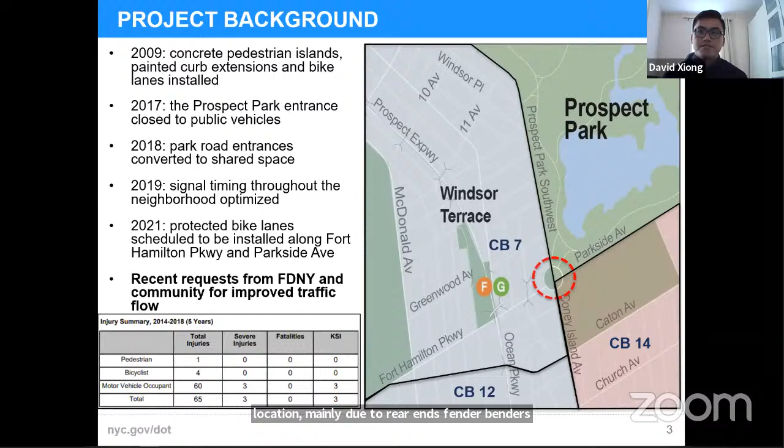It is a high vehicle crash location, mainly due to rear ends, fender benders, and side swipes. Luckily there have been no fatalities, but there have been a few severe injuries.

I want to go through the existing conditions of the circle just to explain the underlying issues right now. The first thing we see as a concern is that there's a lack of clarity regarding which lanes lead to which exit. There's often driver confusion about what leads to where, and one reason is that there's no arrow markings on the ground to guide drivers.

You can see in the photo that this is north of the circle looking towards the Fort Hamilton and Ocean Parkway exit. Most of these cars are driving this path that I marked as the red arrow. This seems like the correct path from ground level, but the correct path is actually labeled as the green arrow. You can't really see the reason why this is until you look at the aerial from the top, and you see that the green arrows are in the rightmost lane, which is the lane you should be using to turn right or exit. The red arrow path, which the vehicles are using, only leads around the circle.

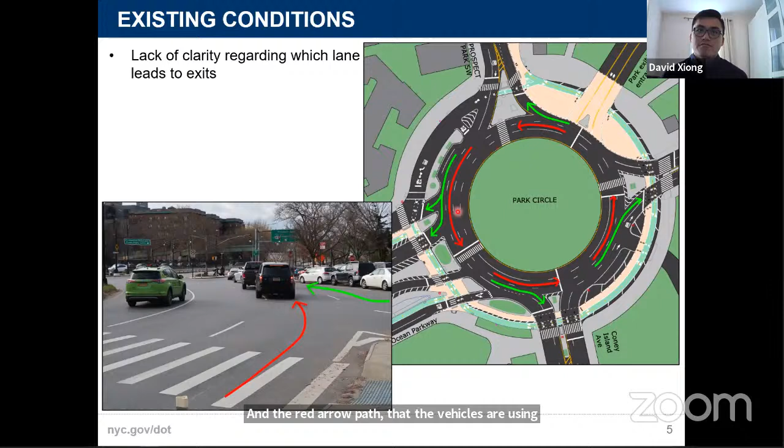Secondly, the vehicles are required to merge into the outside lanes in order to exit. The more lanes, the more merges that occur, the higher the chances of a side swipe or fender bender there are. You can see in this drawing that the green paths lead outwards, and the red paths, which are the inner lanes, only go around and around. That means that if you're on any of these red lanes, you have to merge in order to exit into these green arrows.

What this means is that nobody really wants to be in the red lanes because they don't lead anywhere. You can see this in the photo here: this pickup truck is all the way on the inside lane. He realizes he has to exit, and now he has to merge across a bunch of lanes.

This leads into our third issue: vehicles like the pickup truck are making multi-lane merges from these underused inner lanes. These inner lanes, most of the time, are empty even in heavy traffic. This creates a situation where a vehicle in the inner lane cuts across into the exit, and this is where most crashes occur.

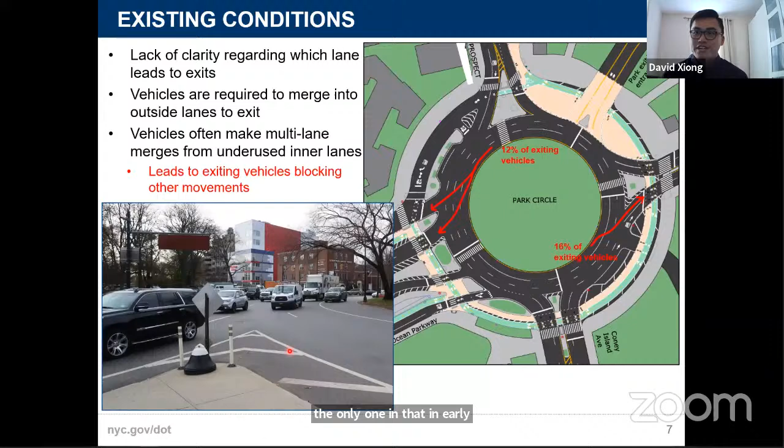Next, I want to show you the traffic pattern typically seen here at busy times. It's a simplified version, of course. Most of the time, cars are almost never in their proper lanes as they queue to exit, as I previously explained. They're on top of other lanes, doing sudden lane merges from the inner lane, and as this occurs and backs up, it blocks other cars that want to continue through the circle, like the one in yellow, from continuing. All these reasons lead to just a knot of congestion that we often see here.

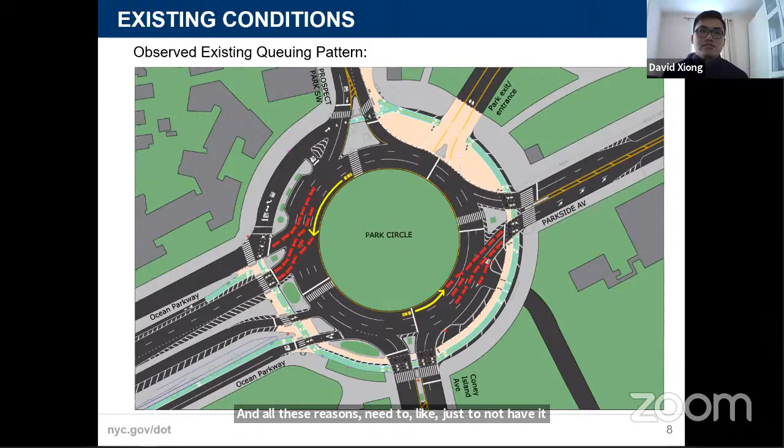Now I want to show you what we're proposing to address this. This project will be constructed by our in-house program by DOT staff. It consists of the following options in our in-house toolkit: exclusive turn lanes, Qwick Kurbs which are vertical plastic barriers, destination signs, and arrow markings.

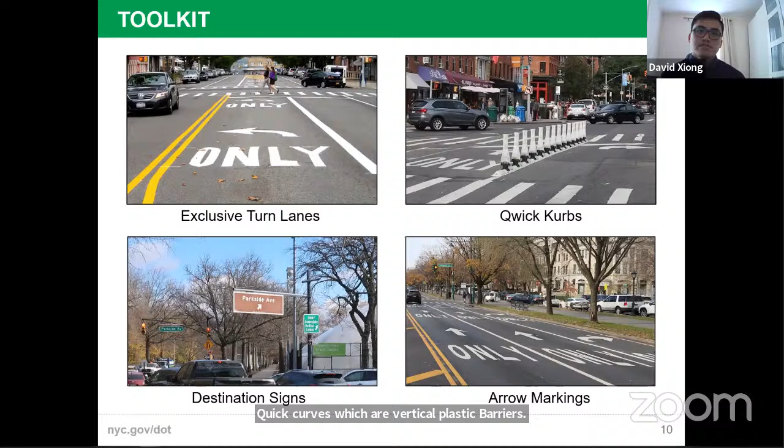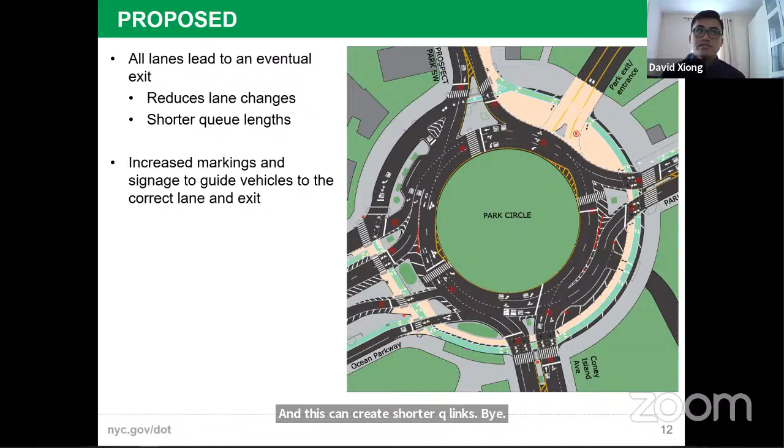We're also proposing to increase markings and signage to guide these vehicles to the correct lane and exit. We can inform vehicles where to be much more in advance by doing this. And we can balance the cars in each lane so that it prevents vehicles that want to go one direction from blocking a vehicle that wants to go another direction.

And lastly, we're adding Qwick Kurbs, the plastic vertical barriers, and plastic delineators near major exits to prevent vehicles from performing those multi-lane merges that I was explaining a while ago. They're highlighted in red here. And this enforces vehicles to correctly queue. Nobody can cheat the line, so to say. And it reduces merges, that prevents crashes, and just improves traffic flow by everyone being more in sync of what they're doing.

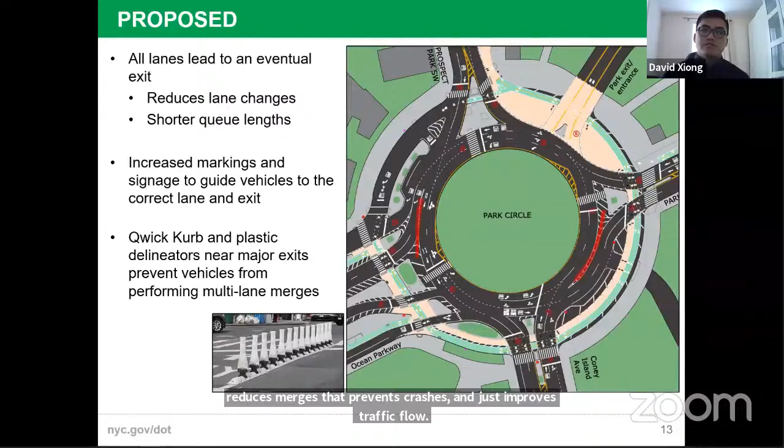Next, I want to show you how cars would queue in this new design compared to how it is now. Note that the number of cars in each diagram are exactly the same. I previously showed you how cars here are currently queuing and how the yellow car here is being blocked by the cars waiting to exit.

So in the proposal with our new configuration, we see that the cars wanting to exit are no longer stuck. The cars that are queuing are being enforced by the Qwick Kurb and the plastic delineators to line up properly, and it's just more in sync. Everyone knows where everyone's headed to.

And lastly, I want to analyze a major existing route that's taken throughout the circle and see how it compares to the new design. So a huge portion of cars throughout the day drive into the circle at Coney Island Avenue and exit towards Fort Hamilton Parkway. In the existing design, if we follow the red path, as we enter the circle we see that our exit's not for a while, so we head towards the inner lane.

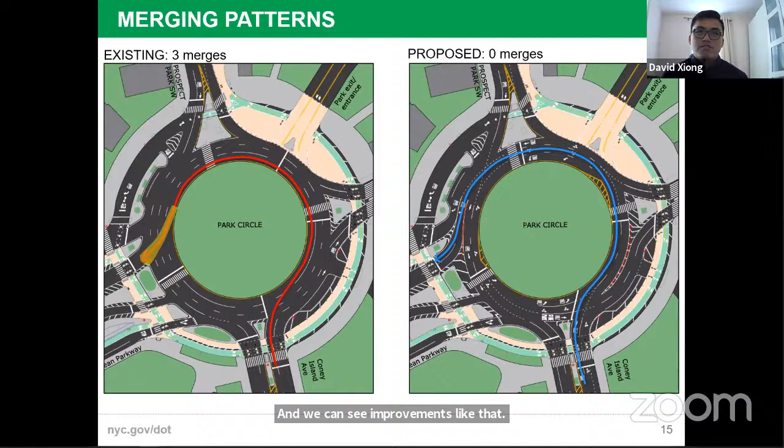So if you notice, the proposal had 0 merges involved. It's essentially we've improved from merging 3 lanes to 0. And we can see improvements like that throughout all different movements, but this is just one example.

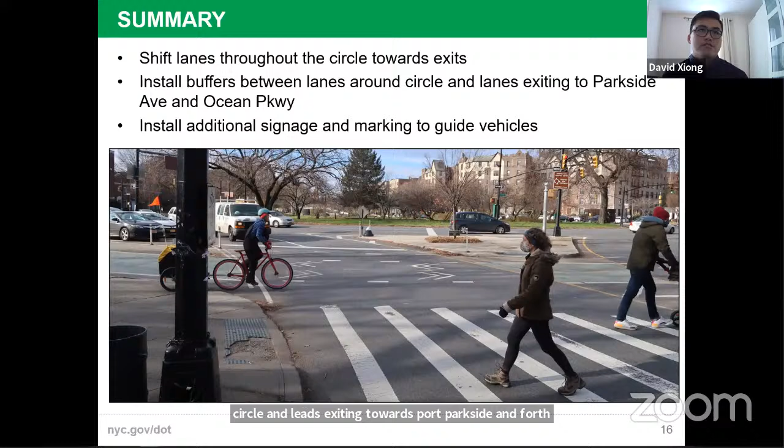And that concludes our proposal, but I want to quickly summarize our changes. We're shifting lanes throughout the circle towards exits. We're installing buffers between the lanes around the circle and lanes exiting towards Parkside Ave and Ocean Parkway. And we're installing signage and markings to guide vehicles. The benefits are simpler, safer vehicular movements, reduced weaving for vehicles exiting the circle, and overall improved vehicular operation.

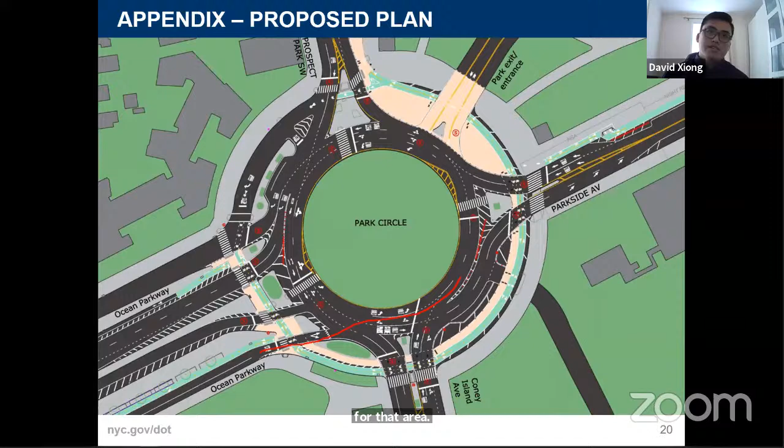So you're not going to do any improvements for that area? So I just drew a line right here, right? You can see that as long as you get into the middle lane. Because you have to cross over, and if you don't cross over, then you have to go into... that has to be looked at.

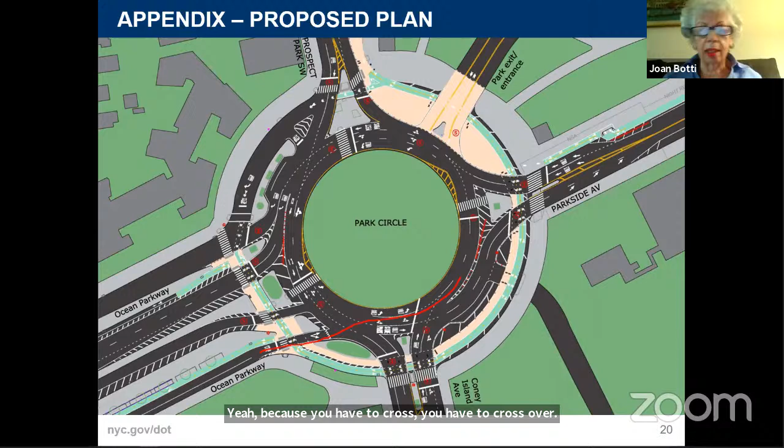Seriously, guys, let's see. So imagine if there were cars right here, right? Many, many moons ago, one of your commissioners...

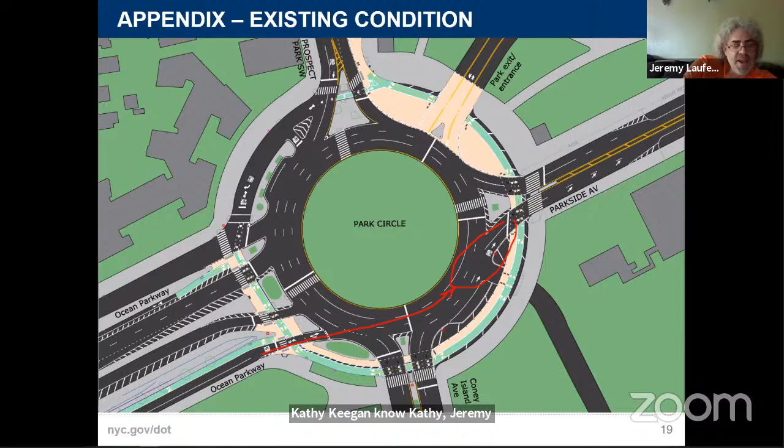Jeremy, refresh my memory. It's Keegan. Keegan said nobody knows the neighborhoods like the people that live there, and nobody knows the neighborhood like the people that are in the cars driving on the streets.

And this area that you have now marked in red is another dangerous area. You have to be very, very cautious and slow and vigilant, because this section of Parkside Avenue comes up very quickly. And as we all know, the traffic around the circle is horrendous at times.

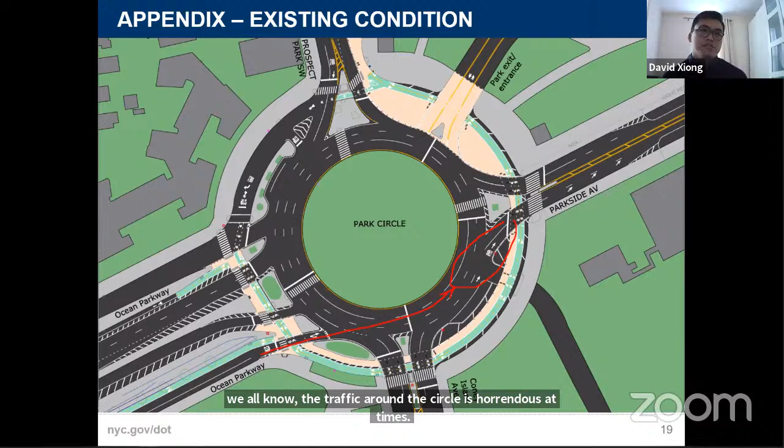Yeah, and I completely agree with you. So that's where I am. If you want my approval, you're going to have to come back to me with some improvement for that area. By the way, I thank you for bringing this to our attention and really concentrating on it, because it really needs it. Thanks again.

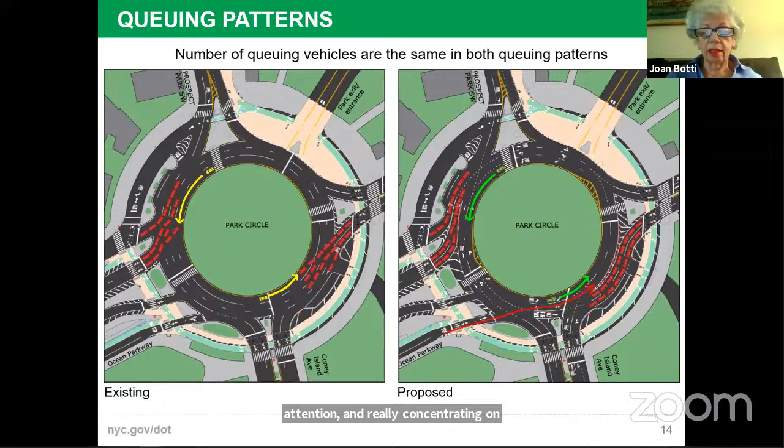Thank you, Joan. I have John Johnston next. I second Joan's concern about that area. I just experienced it. John, I'm having difficulty with your audio.

David, are you having difficulty as well? Do you hear me now? A little better. I second... not very well. I second Joan's concern regarding that area. I just experienced it literally 10 minutes ago.

No one understands the yield sign. They inch up into a block, basically gridlocking Coney Island Avenue. Every time I come around, like dropping my kids off from school or coming home from school, I can get down the hill with no problem. I hit that area with the yield sign and it takes me 15 to 20 minutes just to cross that area with the yield sign and Coney Island Avenue.

No one knows what to do with the yield sign, and they just inch and inch and inch out. No one understands what to do there. I don't know - I would love for them to have a traffic light there to encourage people to stop, so there's some space in between. That area is really bad and causes lots of traffic jams going out.

It got worse when they closed the park to cars, which is fine, but I can't cross there safely. Also when I cross my kids along that circle, especially on the side where everyone goes to Ocean Parkway, there's not enough signal time to cross. A lot of times I'm stuck in between, even when I start at the right time.

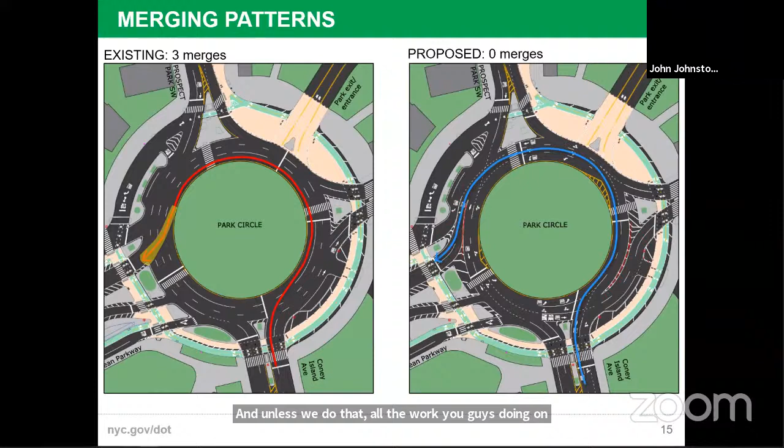But that Joan is correct - that yield sign in that area needs to be looked at really closely, because no one in New York City understands what to do with that yield sign and how to get out into that circle. Unless we do that, all the work you guys are doing on this circle over the years will be for naught, because no one understands that intersection. I go every day and I have problems with that intersection.

That's all. Yeah, so we are giving it an improvement - all these proposed solutions that we've suggested, when they add up together, they will improve the traffic flow. Each issue kind of compounds on itself because it's a circle. If one part of the circle is jammed up, then the rest of the circle gets jammed up. It's like turning gears, so we had to address all those tiny things to hopefully improve this.

Just to address what you are particularly concerned about, like I showed you here - if the cars were queued up as in the proposal, there's a much clearer path to get across, as compared to the existing situation, where you have to drive around this unorganized group of cars somehow. And that's what's causing...

This may be the first car that gets jammed up, but the cars behind it also get jammed up, and so on. So if we prevent that first car from being jammed up in the first place, it kind of unties the knot. David, I think what John was conveying is the fact that the yield sign there allows cars to continue coming into the circle, even though there's a red light along Coney Island Avenue, and then they are gridlocking the folks trying to get off of Coney Island Avenue, who then gridlock them.

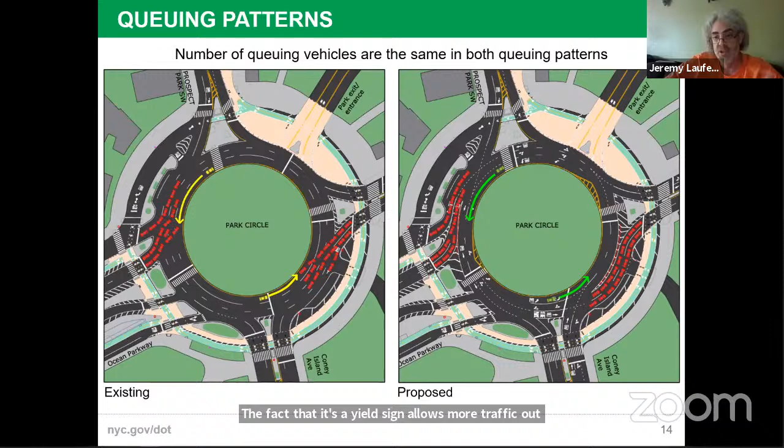The fact that it's a yield sign allows more traffic out into the circle when it can't handle it. John, did I have your point correct? Yes, you did. We're still having problems with your audio. That's why I picked it up.

We're trying to address FDNY's concern here, trying to increase the mobility of their emergency vehicles. We've studied this location for many decades now and we're slowly adding improvements to it constantly. We think that this proposal will give FDNY that access.

But it doesn't. I'm gonna jump in, excuse me David. The proposal doesn't prevent that yield from being a stop. I think the conditions of the circle probably prevent it from being signalized. I don't know how you could signalize two locations so close to each other, one being Coney Island Avenue and the other being the yield in question.

But nonetheless, when the project goes in, we're still going to be here, still going to be watching and observing and trying to figure it out. This is step 13 of 49 of fixing this location - I made those numbers up, but the point is we're just in the middle of trying it. This is just another improvement. We're not going away, the circle's not going away, and we can try and work out that yield sign next, but it's not really a part of this project.

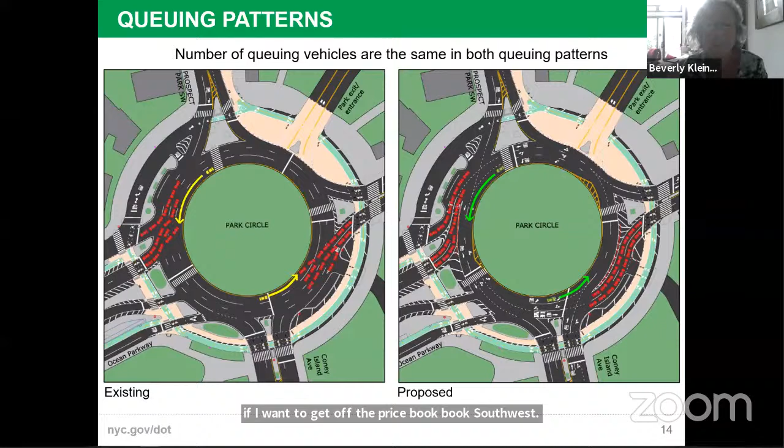Thank you for the presentation. This is a very congested area, and there are times of day that if I'm coming from Coney Island Avenue and want to get off at Prospect Park Southwest, it could take half an hour. I'm wondering if a lane could be added to allow more traffic flexibility in changing lanes. If I'm coming up Coney Island Avenue, I get caught behind vehicles trying to exit at Parkside, then I continue around the circle and it's all backed up with people in the right-hand lane if I want to get off at Prospect Park Southwest. Maybe another lane would help with the growing population. Has that been considered?

Hi Beverly. We've looked at the space in general, what it would look like without any markings, trying to make it anew. As for adding a lane, as we saw in the existing condition, we can have a lot of lanes and nobody using them, like the inner two lanes before, which don't lead anywhere. So if we were to add a lane, it should have a purpose of where it leads. We don't want redundant lanes that people use to cut in front of others, and we don't want to reduce space for pedestrians or bikes.

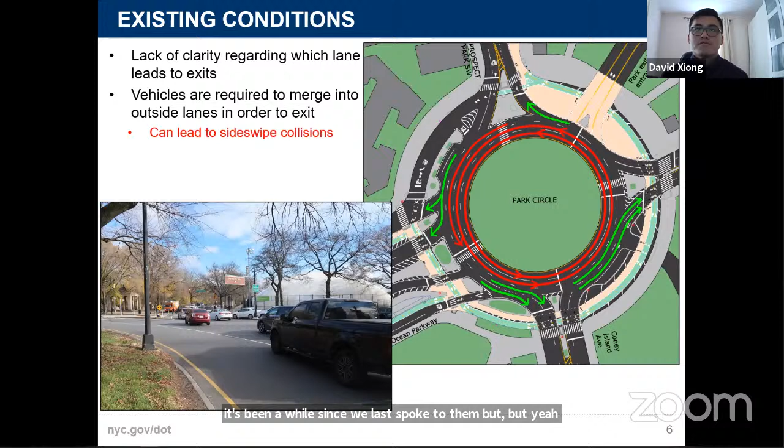We are, you guys are not requiring a vote from the board for this, is that correct? As you guys are moving ahead with this project, and this is an informational presentation. Emily, do you want to answer that? I'll speak for Emily, yeah, that is David and I's intention. We were going to move forward. This was informational, and if there's anything we missed that you could tell us about, we were going to try to incorporate it.

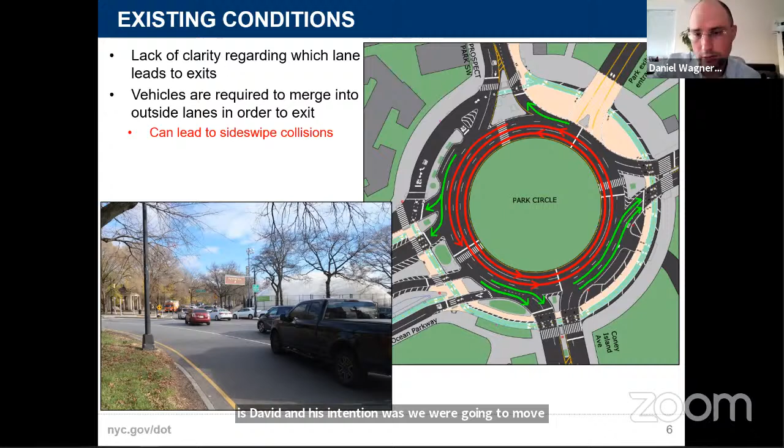Okay, so the board will be sending you a letter. We will, all the attendees' comments will be included. I just want everyone to know this, so there won't be a vote at the end of the meeting, but there will be a letter sent on behalf of the board stating our opinions and where we stand on this. And Jeremy, you can move forward and call on the attendees. Thanks, thank you Zach.

So I have a couple of attendees' hands up. I have Sylvia Aquafreda first. You can unmute yourself.

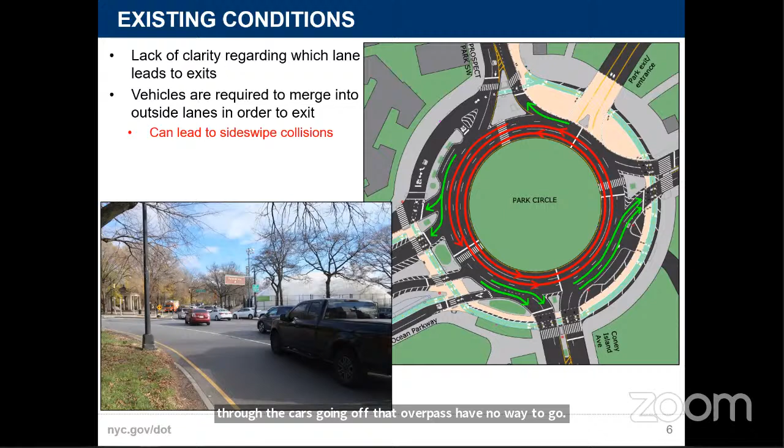Hi, my only concern is the Fort Hamilton Parkway. When that is backed up and a fire truck needs to get through, the cars going off that overpass have nowhere to go because we're down to one lane on that Fort Hamilton Parkway. And the parking is now given shorter space because of the bike lane that's now on Fort Hamilton Parkway. How is that going to be handled?

So what we're aiming to do with this project is to allow vehicles to travel through this circle at a better rate, and so hopefully they can move forward, and as they exit above, the emergency vehicle can maneuver around them.

There is no way to maneuver on Fort Hamilton Parkway from that overpass. The cars that are on that overpass can't go right or can't go left because there's cars parked on both sides. And now with the bicycle lanes, the protected lanes, and bicycle stations, there's no way for cars to move over to the side. It's simply impossible.

So you're asking about what happens when the Fort Hamilton overpass backs up and the emergency vehicle has to go through. Well, frankly, the answer is that's not this project. We were looking at the circle - we're trying to make the circle process better for emergency vehicles to get through. If Fort Hamilton Parkway is backed up, that's an entirely different conversation.

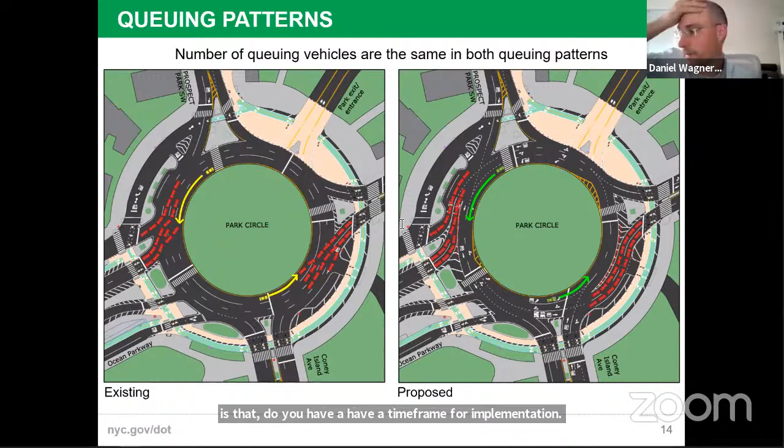So do you have a time frame for implementation? The DOT's all backed up right now, but David and I were hoping it was going to go in August, but that's not happening. It's maybe September if we get lucky, if not October. So we have to send our comments to you very soon. Sooner the better.